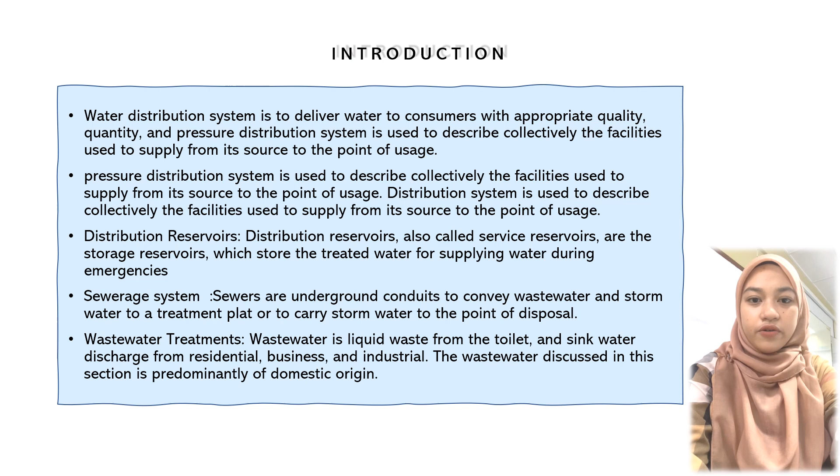Based on our research, the study area was conducted in Taman Mutiara, Parit Buntar, Perak, Malaysia. The study area, Taman Mutiara, Parit Buntar, is a residential area located in Parit Buntar, Perak. It is located about 8 kilometers from the city center and is surrounded by several other residential areas, which are Taman Intan, Taman Nilam, and Taman Desa Mekar.

This area is well developed with amenities such as surau, school, clinic, hospital, mosques, and shops. Taman Mutiara is a medium residential area with a population of over 9,000 people. There is a water treatment plant near Taman Mutiara, which is Jalan Baru Water Treatment Plant, Parit Buntar.

Location of the study area: Taman Mutiara, Parit Buntar, Perak, Malaysia. Type of settlement: residential area. Number of residences: 1,500 residences. Number of occupants: 9,000 people.

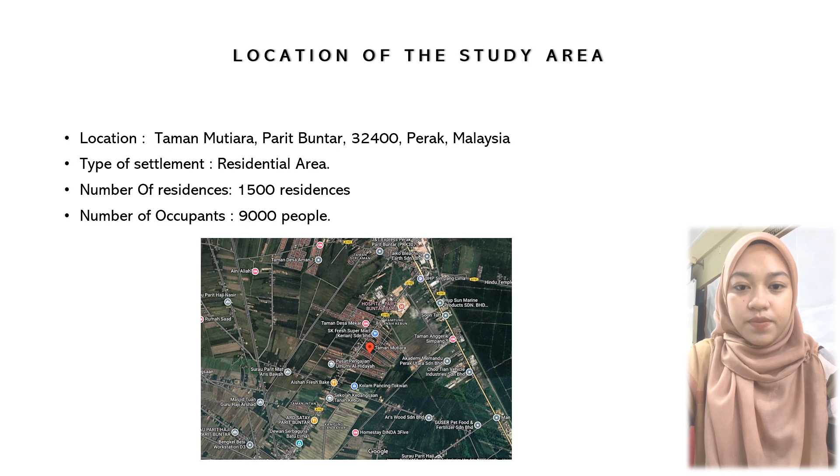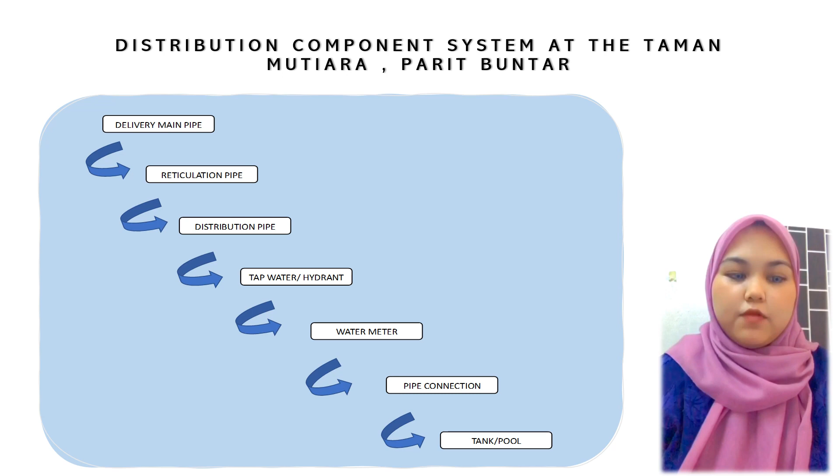This is a flow chart of the distribution component system at Taman Mutiara, Parit Buntar. First, delivery main pipe. Second, reticulation pipe. Third, distribution pipe. Fourth, tap water or hydrants. Five, water meter. Six, pipe connection. And seven, tank or pool.

Components in the distribution system. Components in the water distribution system consist of tank and water pool, pump, meter, fire hydrants, reticulation pipe, distribution pipe, and various types of valve. One, the delivery pipe is a pipe that carries treated water from the treatment plant or from the pump house to the storage tank or from one tank to another tank.

Two, reticulation pipe is a pipe that distributes treated water to the supply area. Meanwhile, distribution pipes are pipes that distribute water to reticulation pipes from water storage tank, treatment plant or from booster pump station.

Three, water pumps are used for hilly areas where the distribution area is higher than the water reservoir area. In addition, the pump is also used on a wide distribution area to ensure that the water pressure is sufficient for all distribution areas.

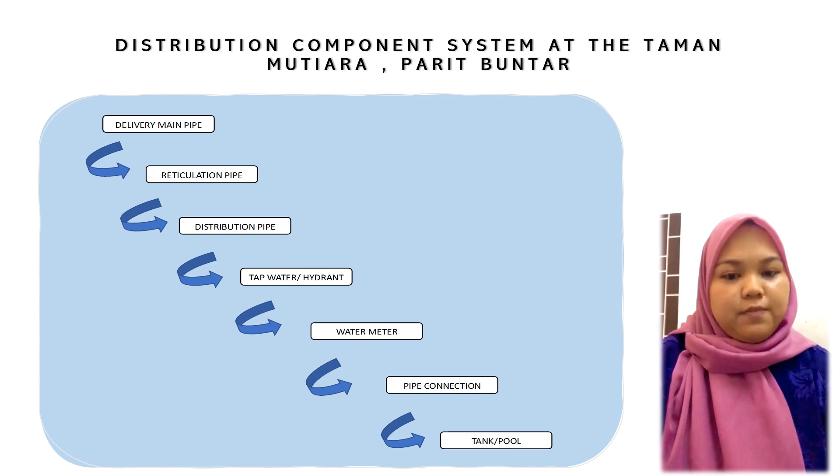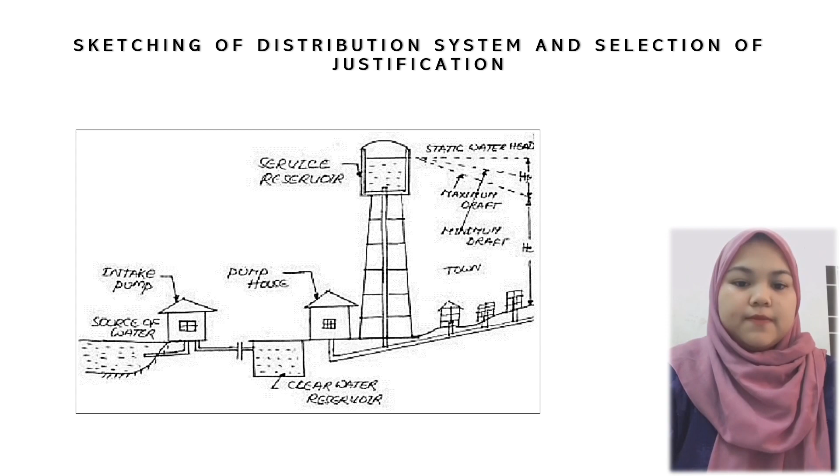Distribution method at Taman Mutiara Parit Buntar. If the source is located at a lower elevation than the target community, this approach is appropriate. Additionally, it has no issue with pressure or keeping the head on the faucet for the customer.

The advantages of the pumping system are: 1. Water can be pumped only when required. 2. Low water loss due to leakage. And then this one is the sketch of the distribution network.

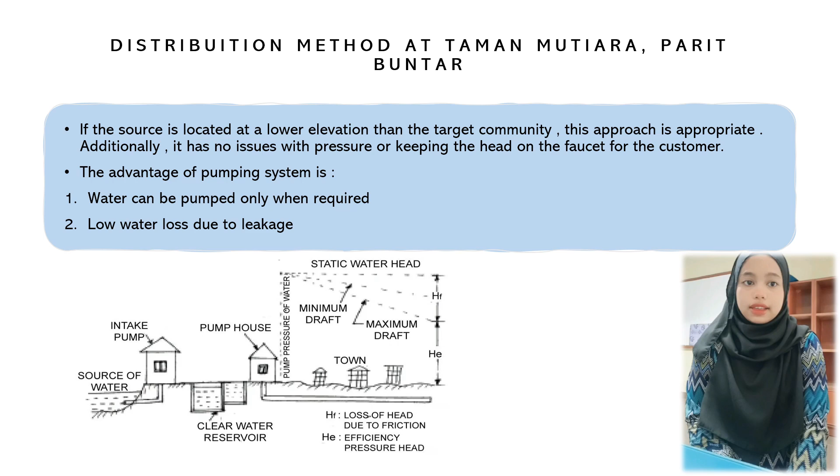Suitable design of sewerage system at Taman Mutiara Parit Buntar. Sewerage system components: drains, underground passageways that transport water to the sewage system. Connections, a group of components installed outside of the building that link the sewage system to the main drainage network.

Stormwater detention vault. Lines that store water from the collector to prevent flooding during periods of heavy rain. Collectors. They are responsible for gathering and moving water from the drains to the primary collectors. Interceptor outfall. This outfall transports water from the primary collectors to the treatment facilities or other locations where it is

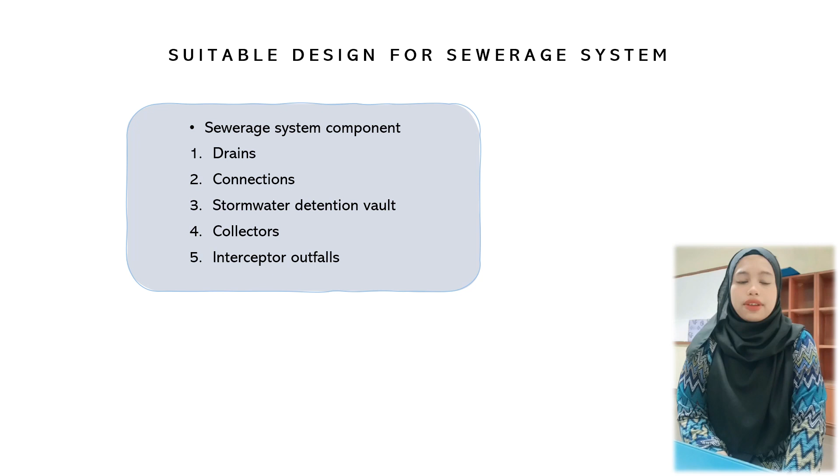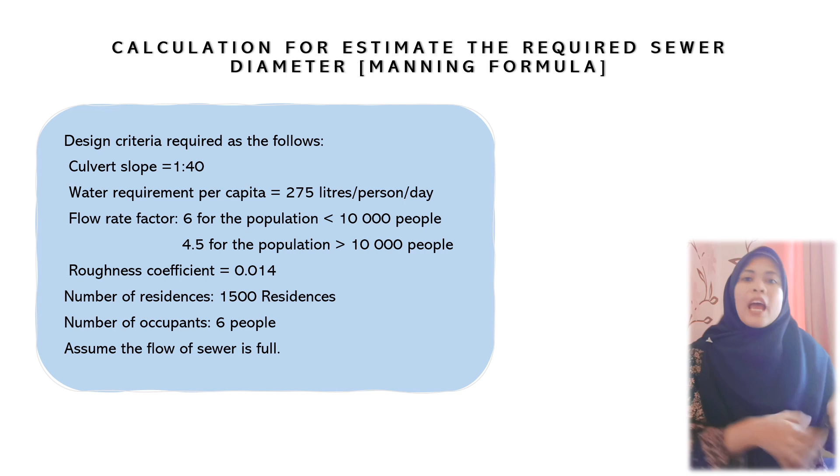Then we need to find the population of Taman Mutiara first. We multiply the residences and occupants. The answer we got is 9,000 people. Since the answer is below 10,000, our flow rate factor is 6. After that, we find the total flow rate Q. The formula is the multiplication of the flow rate factor, total population, and water requirement per capita.

And the answer we got is 171.88 × 10^-3. Next step, we use Manning's formula to find the diameter. The formula is V equals 1 divided by N, which is the roughness coefficient, multiplied by R, which is D over 4, to the power of 2/3, and the root of the value I.

Since this formula has the unknown diameter, we need to find the diameter. So the answer for the diameter is 0.336 meters. That's the diameter of our estimated sewer.

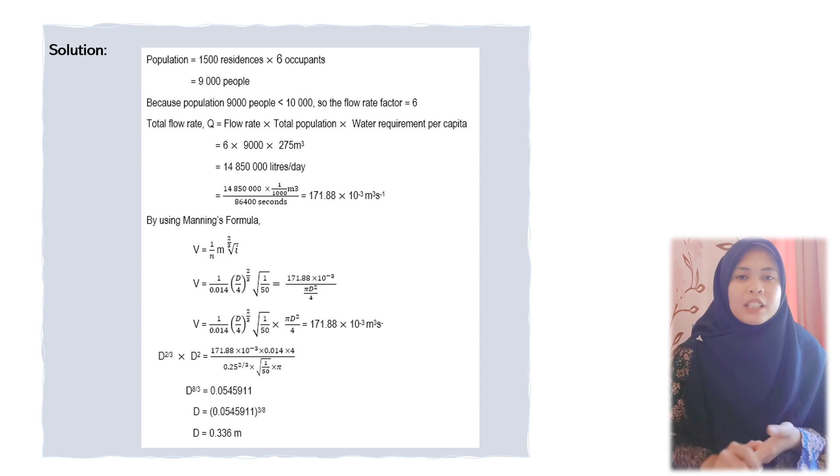The process of sewerage treatment implemented at Taman Mutiara Parit Buntar. In summary, the process involves three treatments. Firstly, the sewerage treatment that is implemented is primary treatment. This stage removes the large solids and grit from the sewage by screening and sedimentation. The partially treated sewage then flows to the next stage.

Secondly, the flow will be at secondary treatment. This stage removes organic matter and nutrients from the sewage by biological process. This stage produces the clarified effluent that will flow to the next stage, which is tertiary treatment.

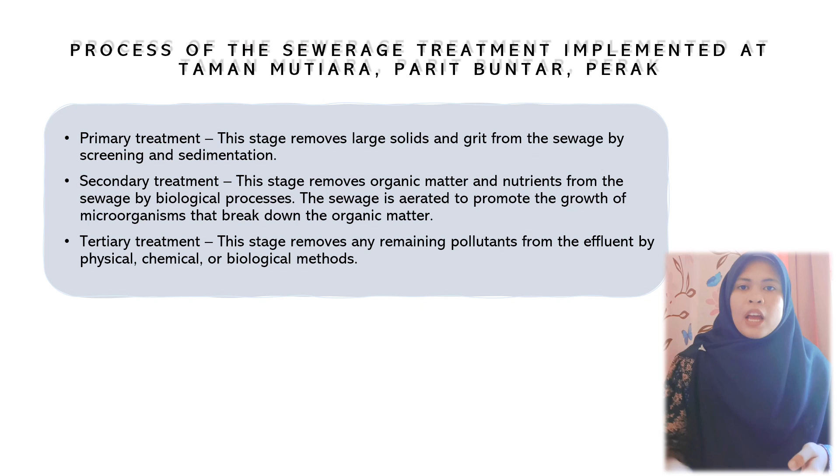The tertiary treatment removes any remaining pollutants from the effluent by chemical, biological, or physical methods. Then, the treated effluent resulting from this stage will be discharged or reused depending on the quality standards of Malaysia.

To conclude this case study, my group and I found that water distribution is the process of delivering water from the source to the end user, either as raw water or treated water. It involves various components such as pipes, pumps, channels, dams, reservoirs, and treatment plants.

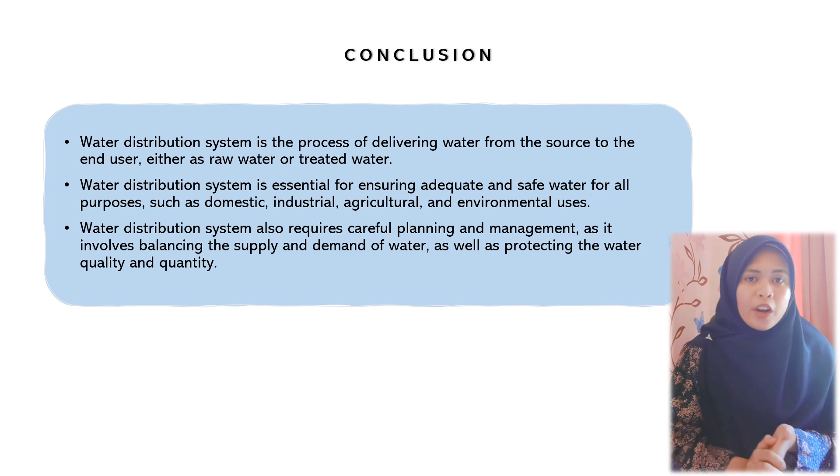Water distribution systems are essential for ensuring adequate and safe water for all purposes such as agricultural, industrial, environmental, and domestic uses. The water distribution system also requires careful planning and managing as it involves balancing the supply and demand of water as well as protecting water quality and quantity in Malaysia.

We recommend the parties involved, such as the water companies in every state, to improve the operation and maintenance of the water distribution system to reduce water losses, leaks, bursts, and contamination. They have to adopt best practices and standards for water distribution system design, construction, inspection, and repair.

Other than that, the parties involved can also enhance the monitoring and control of the water distribution system using smart technologies such as sensors, meters, SCADA, GIS, and data analytics. After that, the government can promote the efficient use of water and reduce non-revenue water, NRW, in the water distribution system.

For example, implement water demand management measures such as tariff reforms, metering, leakage detection and repair, pressure management, and public awareness campaigns. Then, diversify the sources of raw water and increase the storage capacity of the water distribution system.